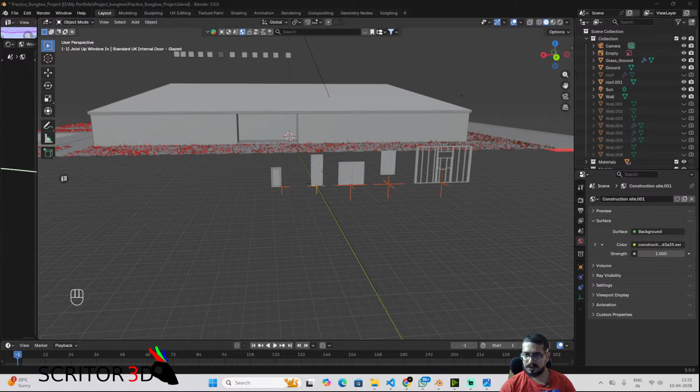Let me check my reference once again. Okay, I'm at the back side, so I'll select these five. I don't know what that is. Oh, this is a light.

Let me check what's happening. Okay, I need to work on my... I'll choose color, and for now

I can use a sky texture. Okay, not the sky texture, I'll use wave or noise texture. Okay, then I'll use a color ramp.

I'll give a blue like somewhat like this, and a darker blue, or maybe white would be fine, or a very light yellowish shade, and I'll add it.

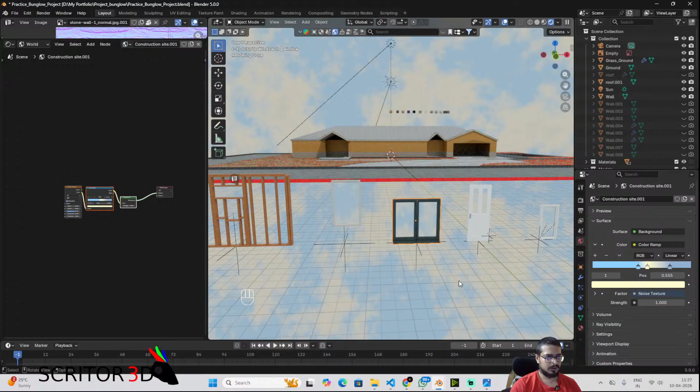Now we'll start with the windows and doors. For window, I'll select this window and we'll go back to object in shader editor for now, and I'll select the color.

I want that color, basically this one, so I'll copy this. This is material, the name is material, so I'll change it to material. Okay, so this looks fine now.

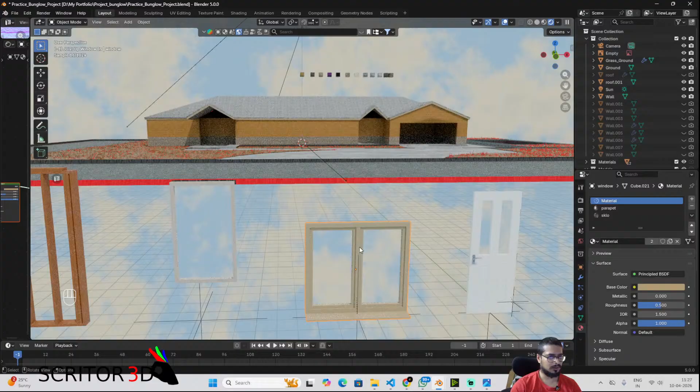In edit mode, I'll select this, duplicate it and move it on X 2.5, no, GX5, yes. So it looks somewhat like this.

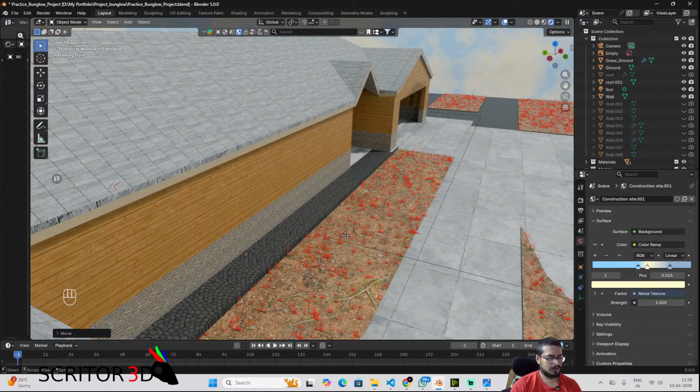So I'll move it back. GXY. GZ. I'll go to solid viewport so that it's easier for me to place things and do a boolean as well, but I need to keep

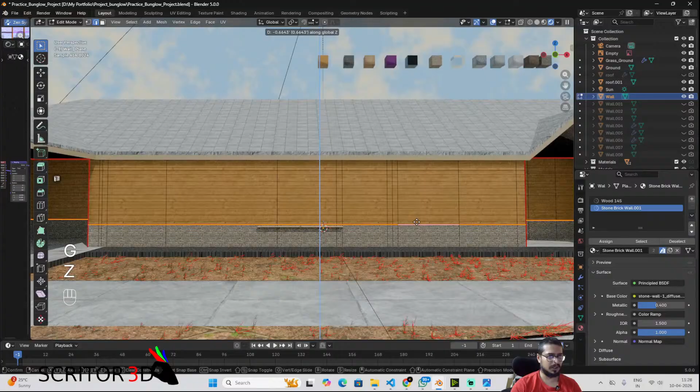the window above this boundary of the stone boundary, so I'll reduce this, take this down a bit to somewhat like this, and I'll select my window again.

I don't know which one it is. Yes, this one it is. So GY to something like this. GX.

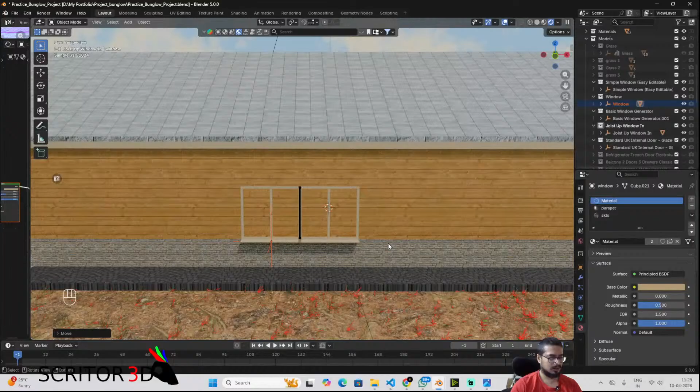I'll press Shift S cursor to selected. Shift A, I'll add a cube, or let me just select this. We'll go to solid viewport again, press 3 and select this. Yes, G. Okay, no, I'll not select this one.

I'll select only this. I'll duplicate this, P selection, and go to edit mode. Go to edge select, GY it, GY,

A, extrude, GZ, and I'll select this face, GX5, and

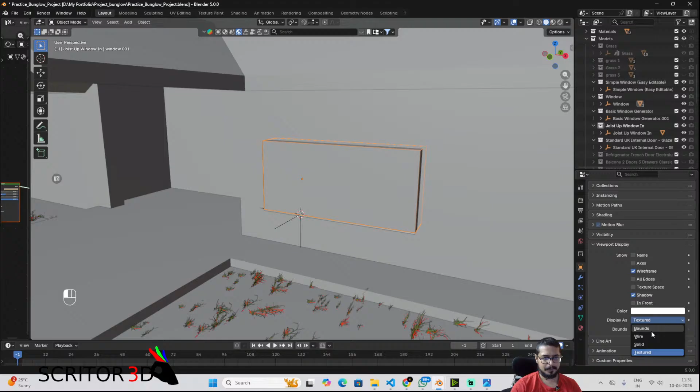I'll go to our object properties, and in viewport display I'll change it to wireframe, display as wire, and I'll select my main- what do you call this, the walls of our house, and then I'll go to modifiers, add a boolean modifier.

I'll keep it on- okay, it's kind of done. We have a hole in our wall now.

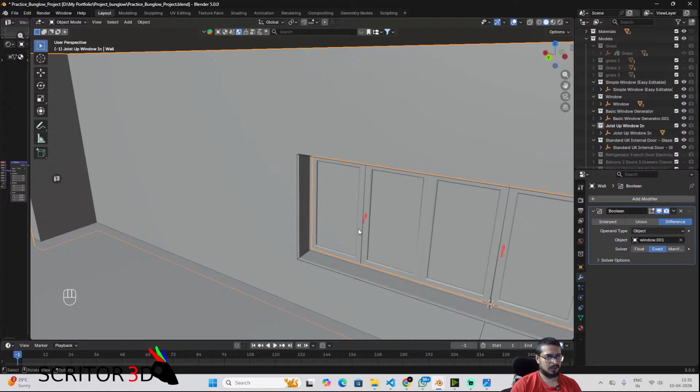I'll go to edit mode and move this down a bit, yes, so that there are no gaps. And let me just go to our rendered viewport and I'll select this box which I'm using for the boolean basically.

So I'll select this window, select the entire collection and press M. I'll create a new collection called windows and doors.

I did something wrong, I guess. Windows and doors. Create. Yes, so I'll delete this.

We have our window and doors over here. I'll turn off the boolean for now so that we can see what's happening.

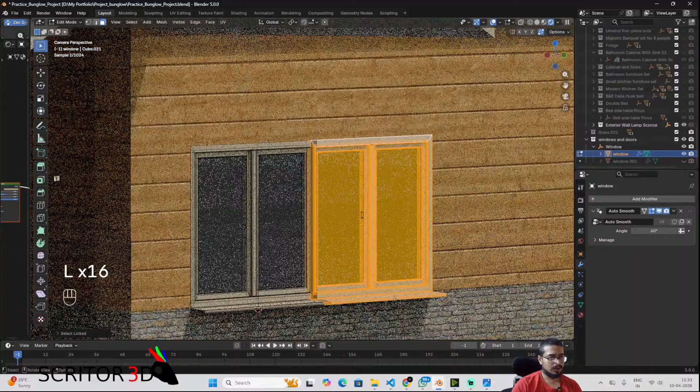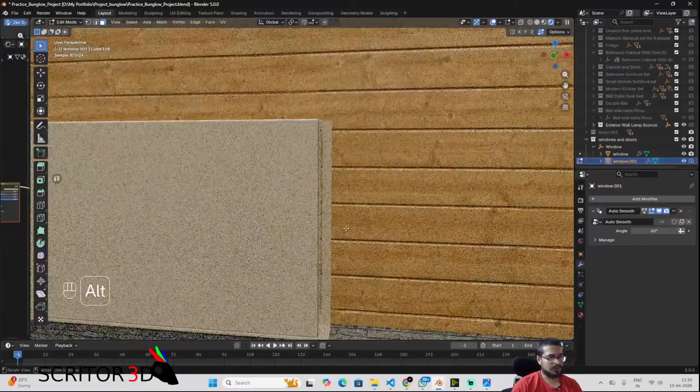I might have to adjust this boolean cube object. I'll move it on X as well, and turn this off. Okay, so this is it. I'll move this up a notch, somewhat like this, and I can even increase the scale.

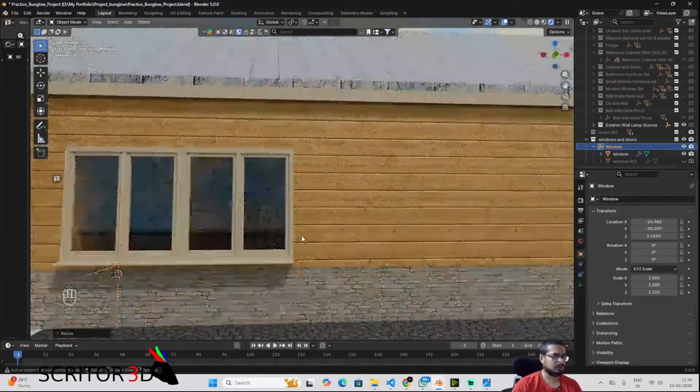I'll move it on X, and duplicate this, Shift D, X. Okay, one second, it was turned off, maybe that's why. Shift D, X, and Shift D, X again.

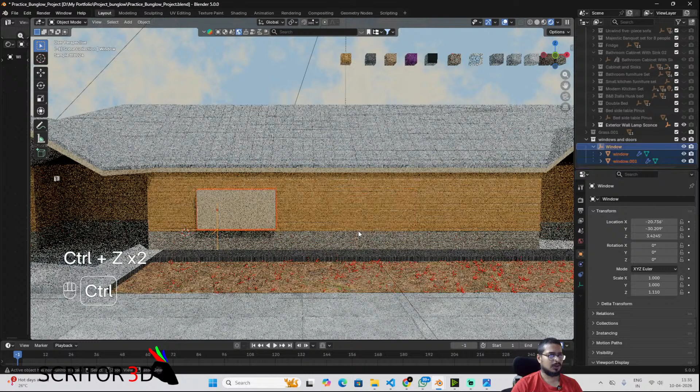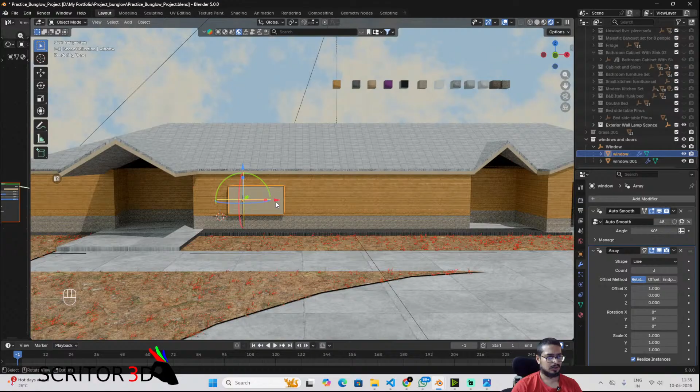Or I can use an array, that might be a better choice. So let me go to modifiers. I'll select the window, add an array modifier, and come to front view.

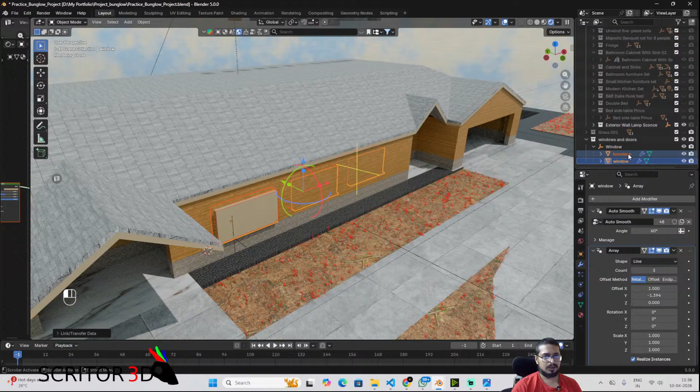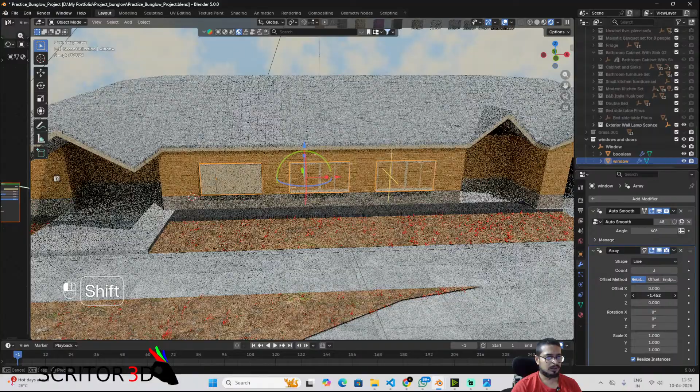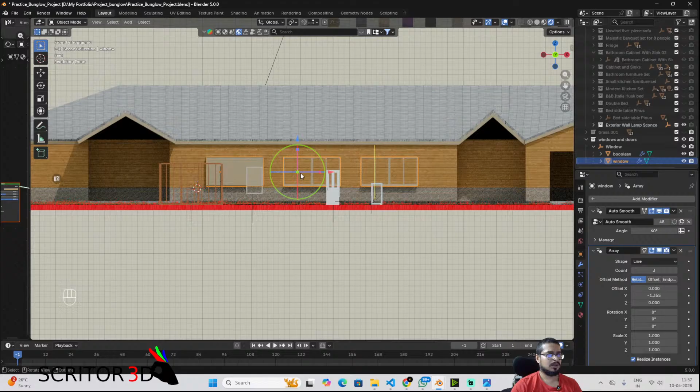Come to front view again. That's great. I'll do that again, Control L, copy modifiers. Oh sorry, opposite. Control L, copy modifiers. Now if I turn off the Boolean object, everything should be working.

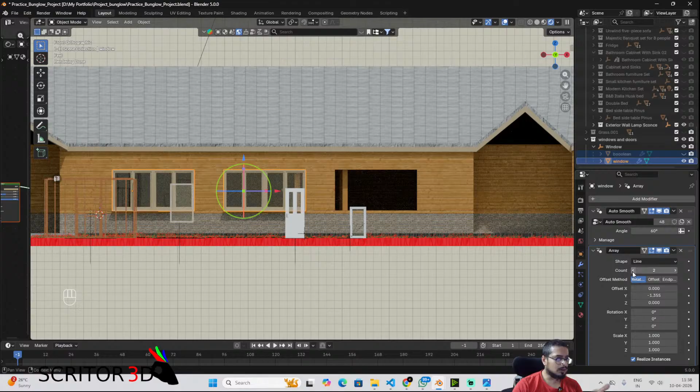I can reduce the count to 2, and same with the Boolean, reduce the count to 2. Now I'll select my window object and move it on the left side first, to somewhat like this.

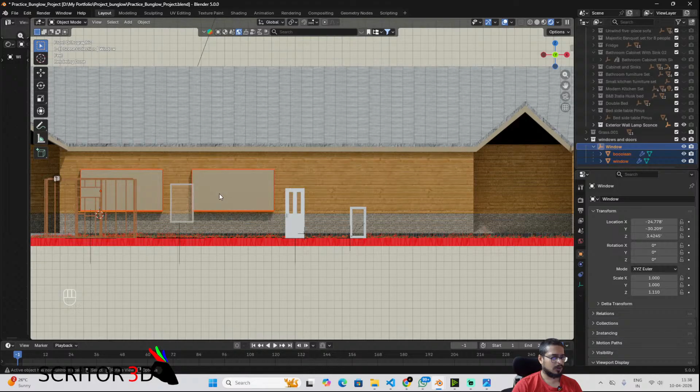I'll copy all these, Shift D, X, and move it on this side. In this one I'll remove the array for both of them, and let's check. Oh sorry, my bad. I'll turn off the Boolean objects for now. Okay, Boolean is not working on this one.

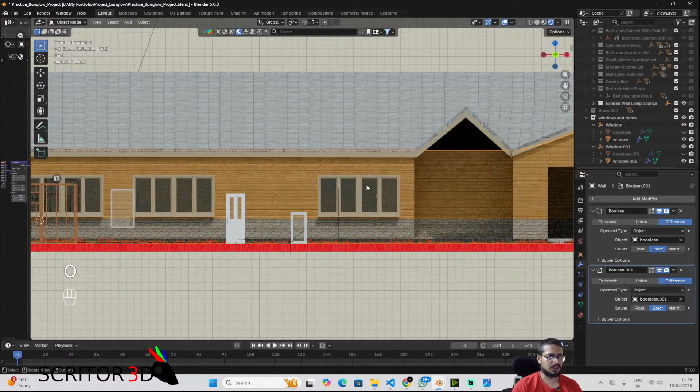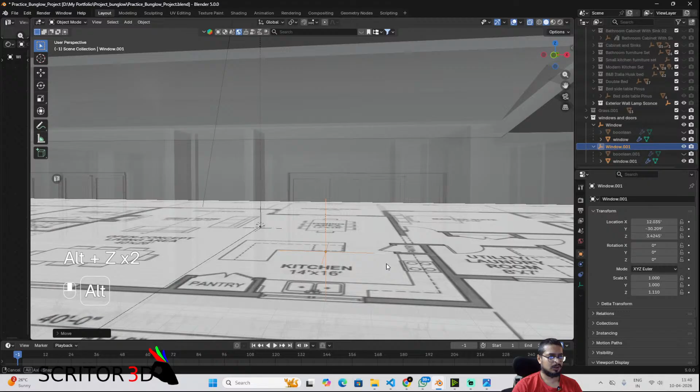Let me just select that, add another Boolean. Boolean 001, yes, done. I need to shift this window, GX, and I'll check and render viewport.

What is the result basically? Pretty much satisfactory. Oh okay.

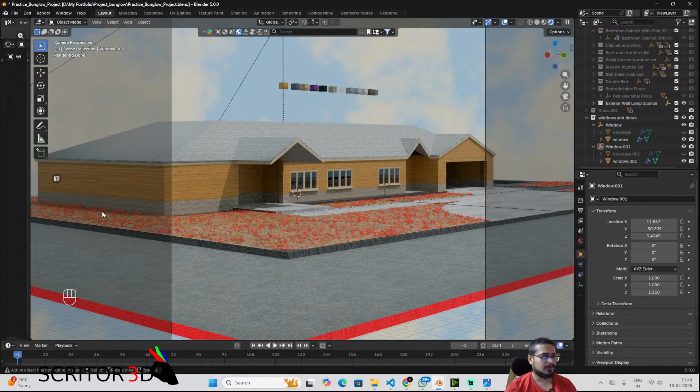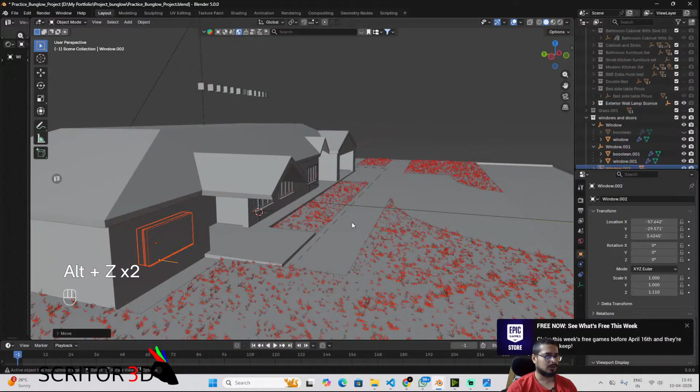And now I'll add, I need to add another window on this side, so I'll select these three, duplicate them on X, and come to side view. GY. Too many ads I guess.

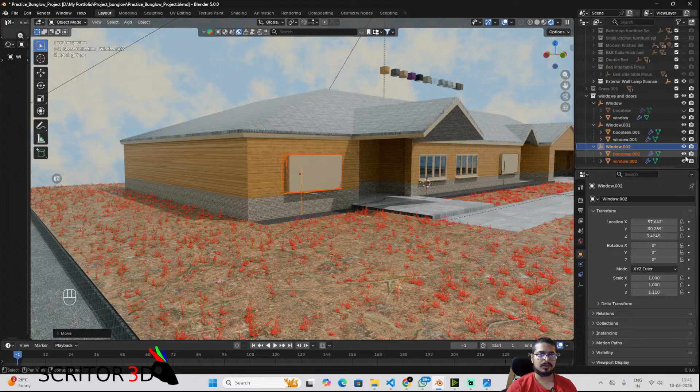That's it I guess, let me just check it. Okay, I need to have another Boolean now, or I can add all the Booleans together, join them all together. I'll join all of them, so that I don't need too many modifiers stacked over here. So I'll select the second boolean, then the third, pressing control, and then the last one.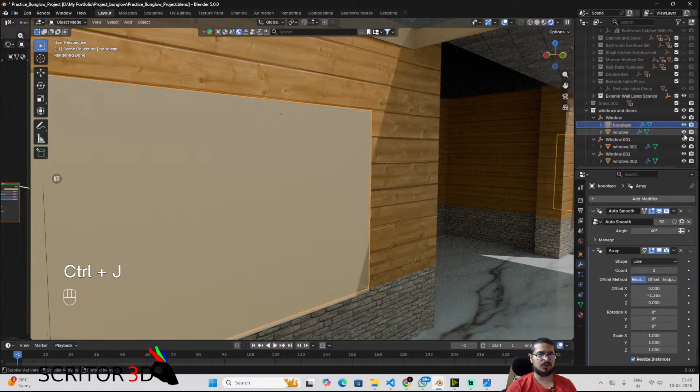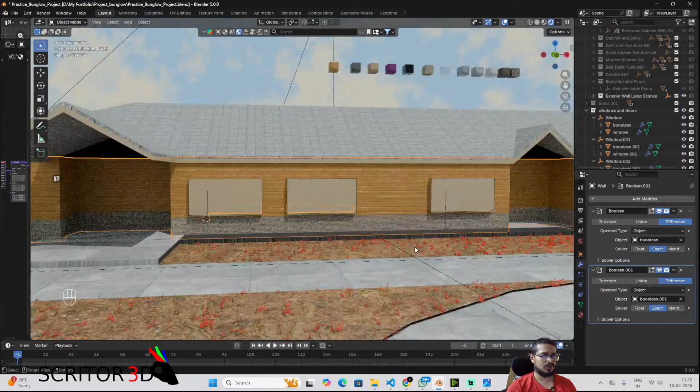And I'll press Control J, I'll join all of them. Now okay, on array it's not working now. So we need to, so I'll press Control J, sorry, Control Z, not Control J, Control Z. I'll join this one and this one, sorry, other way around, Control J. And now if I turn off all the booleans,

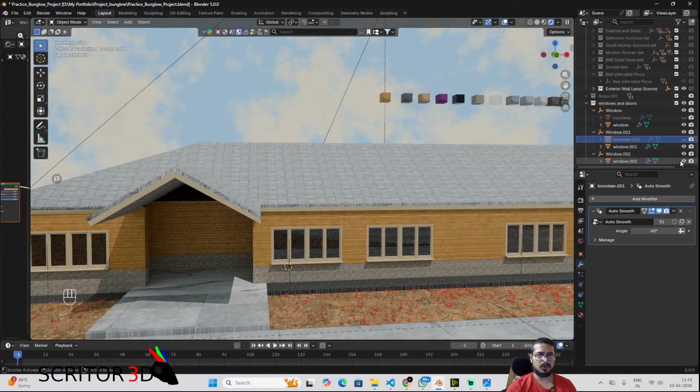Yes, everything works fine. I can maybe shift this a little on X. Okay, I might have to turn this on. Go to edit mode, press L to select only this one and move it on X as well, a little more. Yes, now if I turn this off, it seems fine.

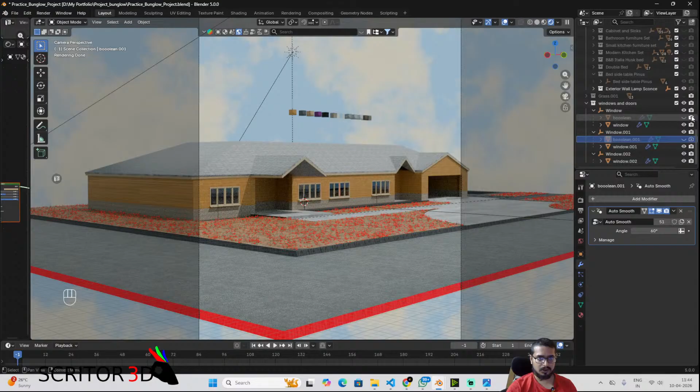Let me just take out a quick render to check. Okay, I need to turn off the visibility of the booleans and render it again. So this is what I'm getting as of now. Cool.

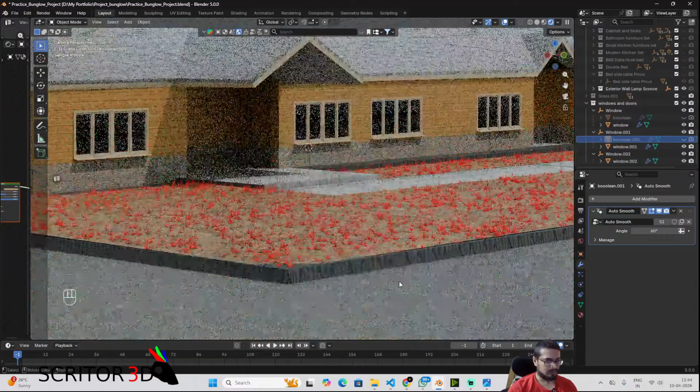I'll press A, N for opening the N panel, mark by angle, U, unwrap angle based, and now I might, okay, black paving stone or whatever this is.

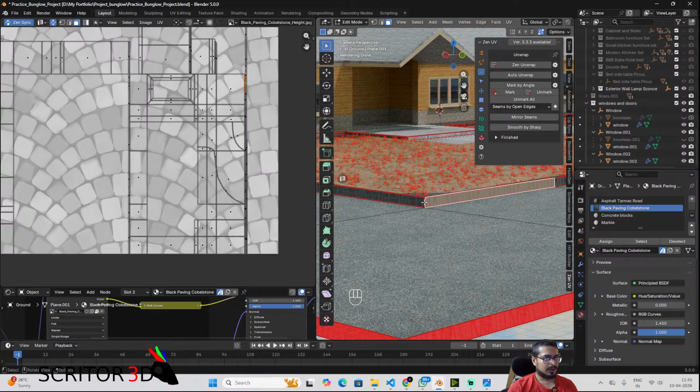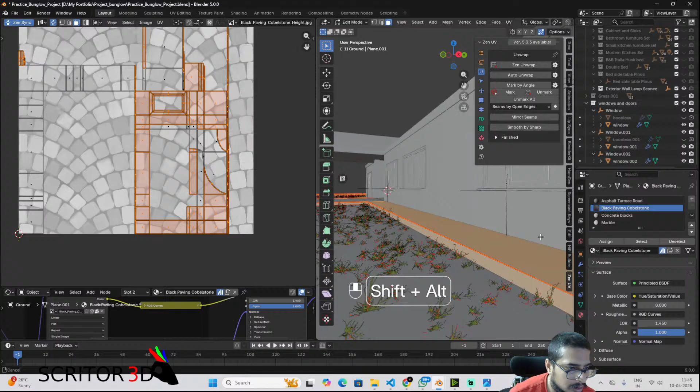Let me just select all these where this texture is being applied. Let me go to the solid viewport. Okay, so I don't, cool.

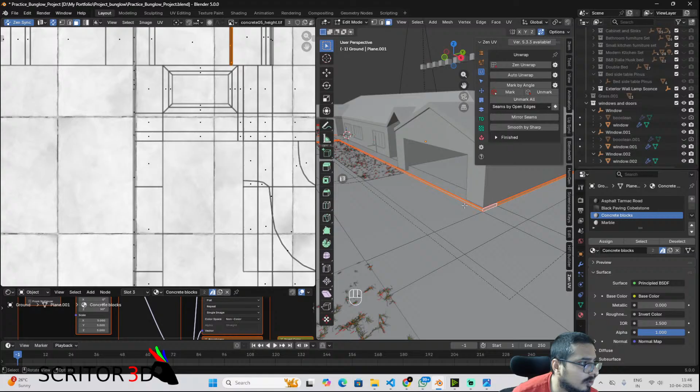Mark seam. I don't know why it's different. Assign concrete blocks. Okay, let me just go back to render viewport quickly.

No, edit mode, assign, and scale this up.

Nothing's changing somehow. I think I need to apply scale. Nothing's changing, that's seriously weird. I might have to, no changes at all.

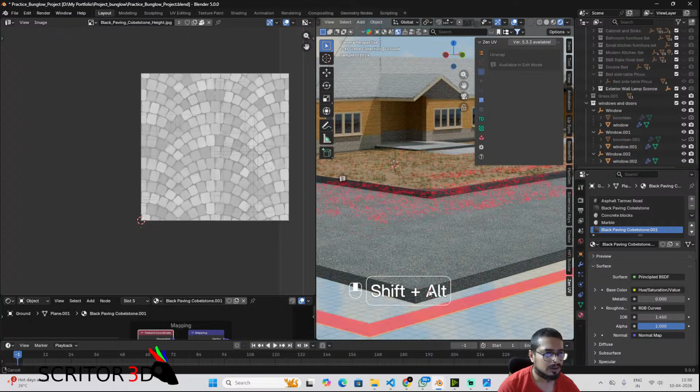Okay, it's on object instead of UVs, that's the reason for it to not work. Now it will. Let me go back to my UVs again, scale this up to something like this. Now it will work fine.

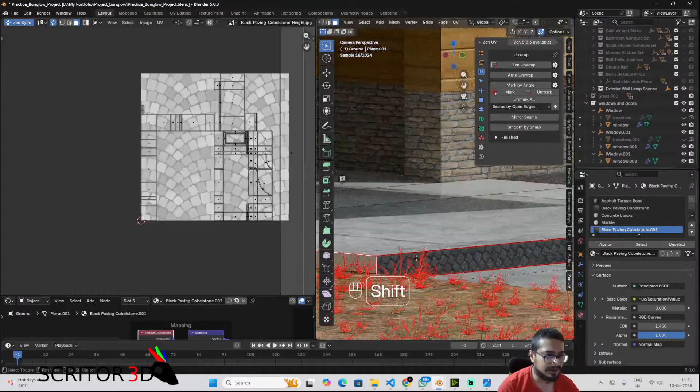I need to add small detail over here. I'll select this and this side, even though it's not visible, but still. Okay, this much, and I'll choose my marble, assign.

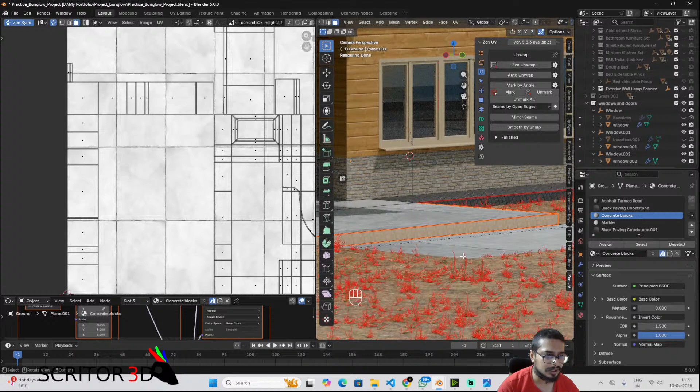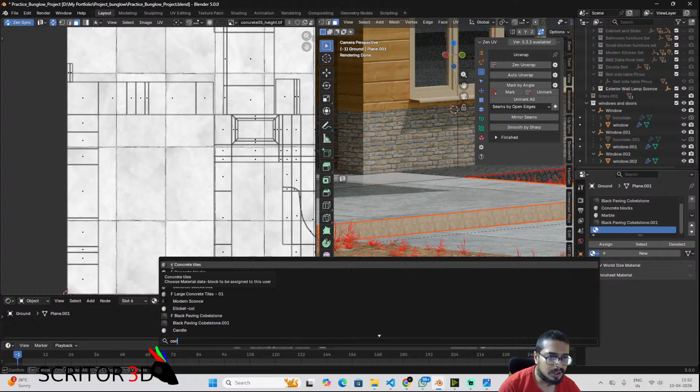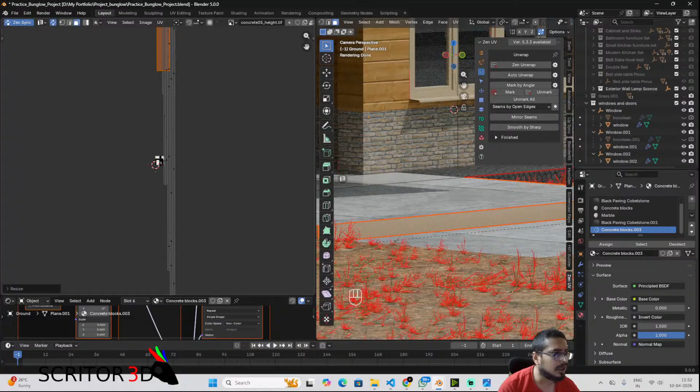I'll go back a few steps. This is what I need to add, but I need to add another material where I'll use the same concrete material, concrete blocks, and I'll duplicate it again and assign it. I'll scale it up, or I might have to scale it down. Yes.

Somewhat like this. This seems fine. Let's add some pillars and stuff to this part.

Because this door is like, I'm going to model that door. Because I don't have a specific door which fits fine, I'll use this door as the base, and I'll add a few more details all around so that we have a nice door over here.

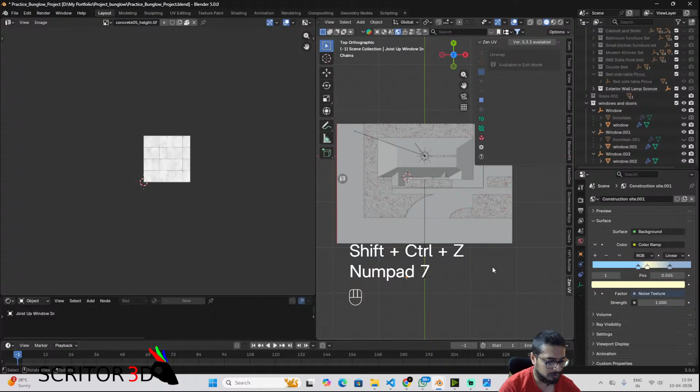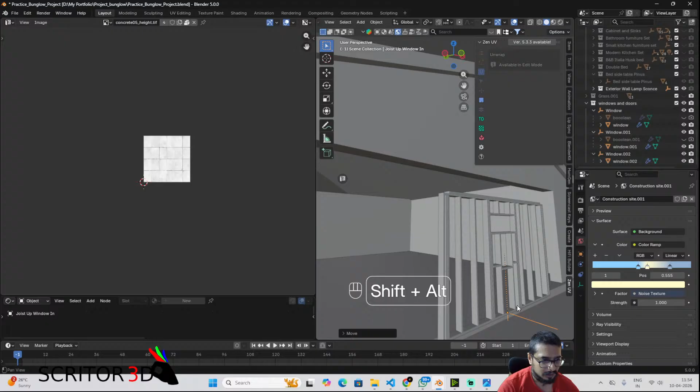So we need to add a small ramp as well so that it looks nice, because the car won't get in easily if there is a 90-degree step over here which I need to work on, as the car might not be able to climb this stair or whatever you want to call it on the platform.

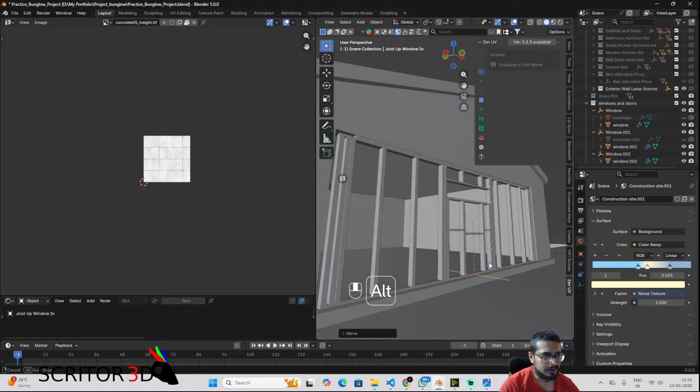I'll come to the front view. GZ, SX, GX, SX, GX, SX, and SZ. Okay, SZ smaller, GY. Yes, I might have to scale it on X a little more, move it on X a little more.

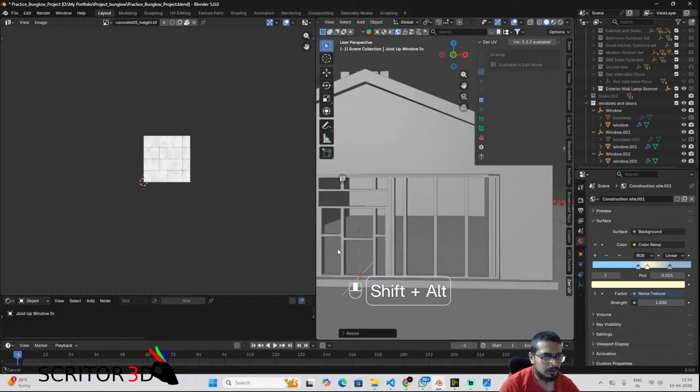Now I need to add some windows or some material to this. Okay, these are all separate blocks actually. So what can I do? I might have to add 3, 4, 5, 6, 7, 8.

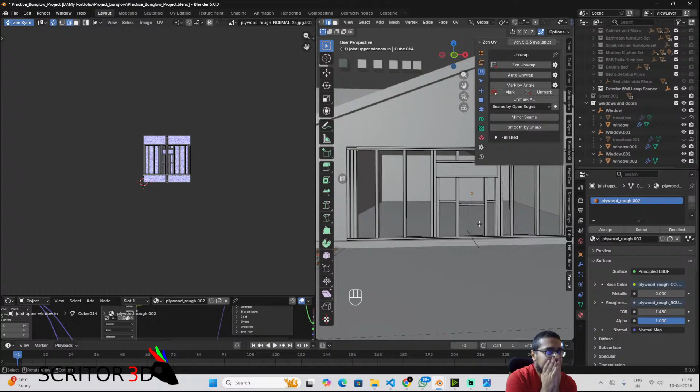Cool, I'll add some loops, and from those loops I'll use this edge, and I'll add it over here as well, over here as well, and one over here.

What I'm gonna do is I'll use this, this and this edge, select this one, and I can separate it. P selection, go to edit mode, A.

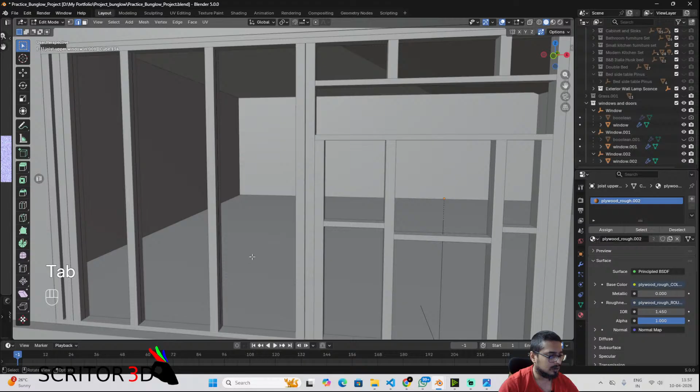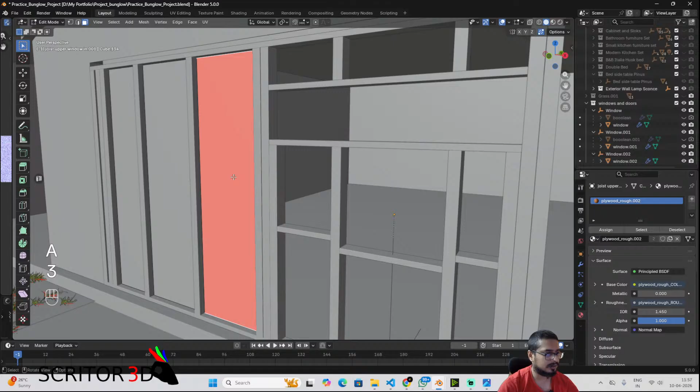So I'll select this one and this edge, press F to fill it. This one and this one, press F to fill it. This and this, F to fill it. I'll select this 3, Alt N, flip. Okay, done.

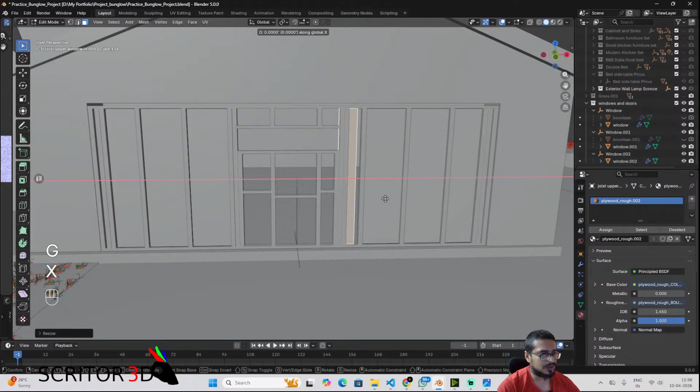Cool. Shift D X. Shift D X, Shift D X, Shift D X, SX, GX. And we have got our windows.

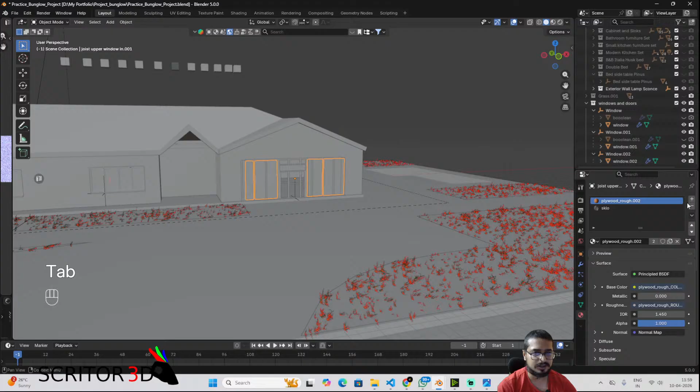I'll check what material we have, like SKLO is the material, so I'll add a material, uh, I'll just remove this one. Let me just check in render viewport. Yes, it's working fine. I can now create a duplicate copy of this material and add some color maybe.

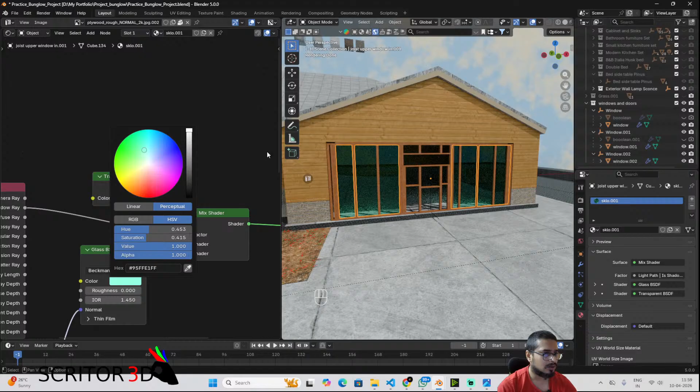Let me just check. Yes. And now I need to add a few more of these. So I'll select this, Shift D X. I'll keep it in center, scale it on X, move it on X. This is what the result is.

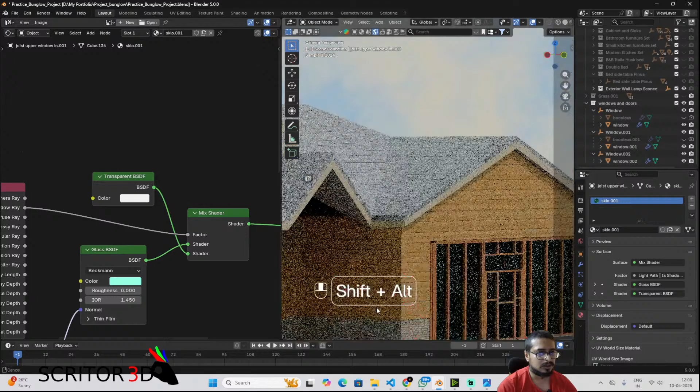I'll select my roof. I want to take this part out a little more, like this, GY. Yes.

I'll add a small balcony pillar or something like that over here. Sorry, fence over here.

Let's just take out a quick render and check how things are looking at the moment. Okay, so that's not visible. I don't know why, but yes, I'll move all this to our windows and doors collection.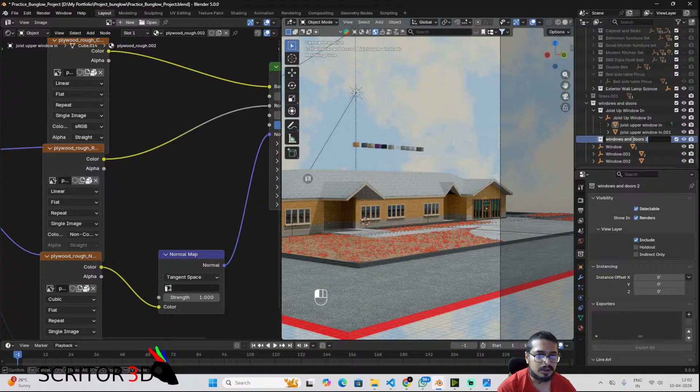I'll add a new collection, windows. Yes, and I'll move all these windows into this collection windows. Just keeping things correctly in the collection system so that it's easier to manipulate things later on as well.

And I'll take out a render again to check. Yes, looks better than before, obviously. And so not bad at all. We can keep on improving.

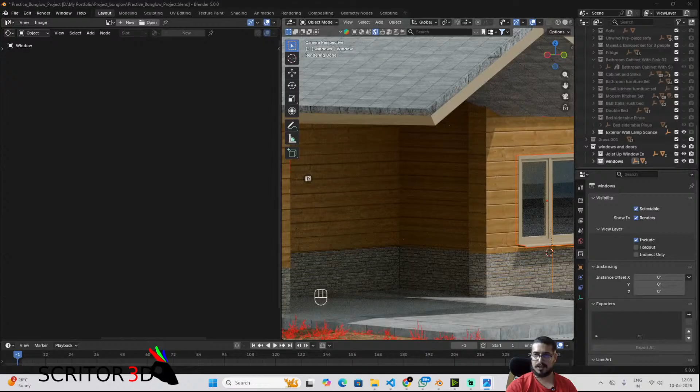Definitely will do more changes. Wait, let me just go back to my reference image. There was a lamp.

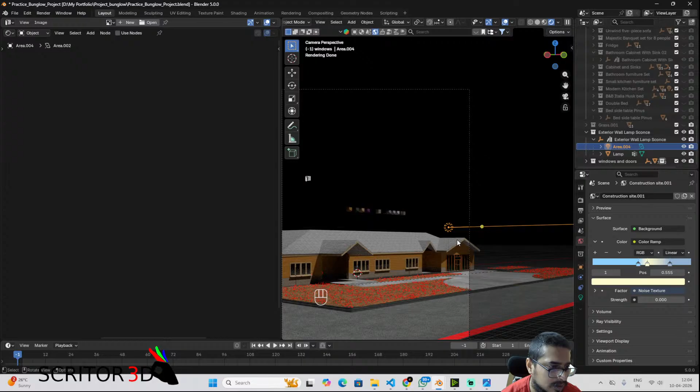I'll delete this one for now. I'll go to my world properties and reduce the strength so that it's easier for me to check how the light is actually working. The lamp is too small or what? Okay, this is this lamp. So I'll move this down.

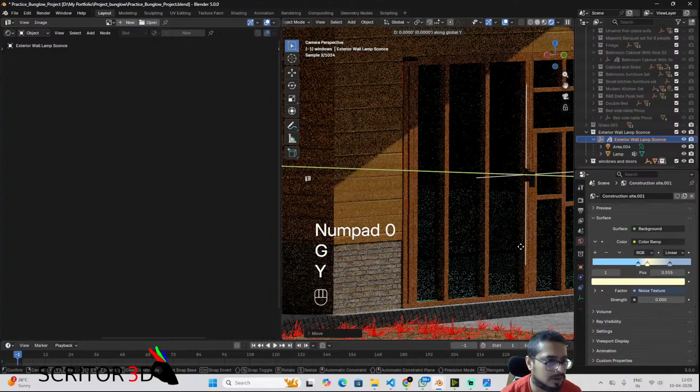RZ 180, RX 90. Okay, GY, GX, GY. I'll go to top view. First of all, I am going to place it over here. GY, GX, GZ.

I'll duplicate this. RY 180. Move it down to something like this.

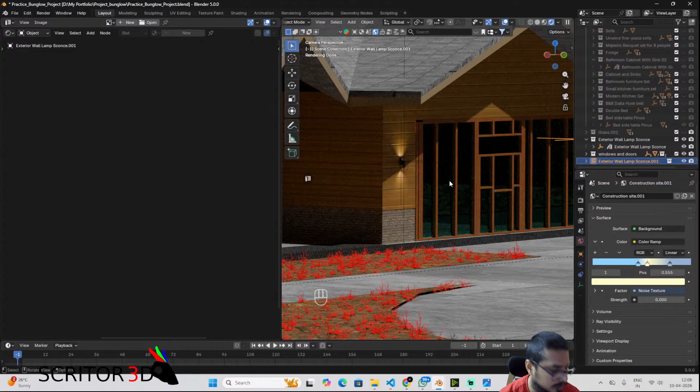And now I can create, like, press Shift A, collection instance, exterior wall lamp sconce. Okay, I'll use this, GX. Let me just check where the origin is. Basically Q, origin to geometry. Yes, now it will be way better to move things around.

Somewhere here I want this, so 3, GZ, GY, GY, GZ, GY. Yes.

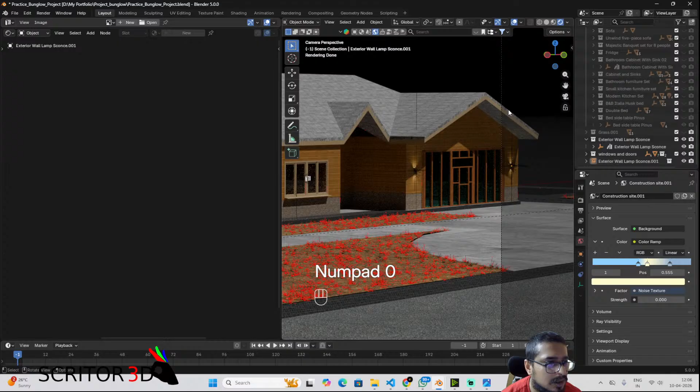Let me go to render viewport. Okay, it's out of my render basically, but still just checking what's happening right now.

I might change the colors to a darker shade so that it feels like it's about to get dark a little.

Or I should just go for the black. So the clouds are way too on the heavier side. I should reduce the clouds.

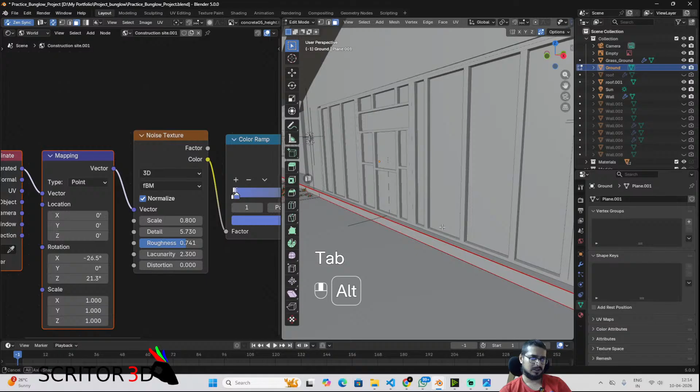And let's add the ramp. I'll save the file. Saving the file is very very important. I have a very powerful PC, so it's not crashing that quickly. But if you don't have a good machine, it will crash quite often. So it's better that I have separated the mesh. You need to save the file basically. After a few steps that you cover, you should save the file. Keep saving the file whenever you do 4 or 5 changes.

I'll add this texture, which is concrete blocks. Let me just take out a quick render again. Yes, much better.

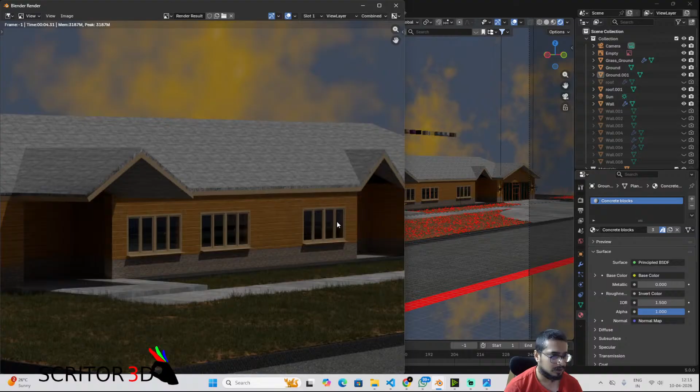Let's add few more details. I'll duplicate this, Shift D, GY, GY, a little more, yes, and then duplicate it on x-axis, Shift D X, Shift D X, and Shift D X.

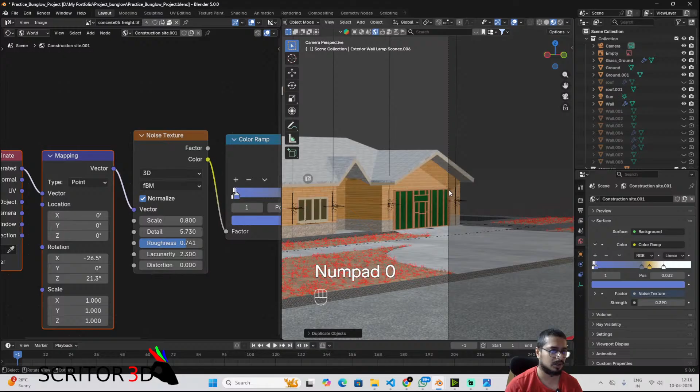Instead of material view, I'll go to the render view again. Come on, come on. There is some issue. See, things start to act weird.

Just after adding these lights, it's not rendering at all. I don't know what's happened. Should I restart the file or what? Refresh.

Let me just save and exit. I think there is some major issue that I need to address now. Why are the lights not working? Oh, come on.

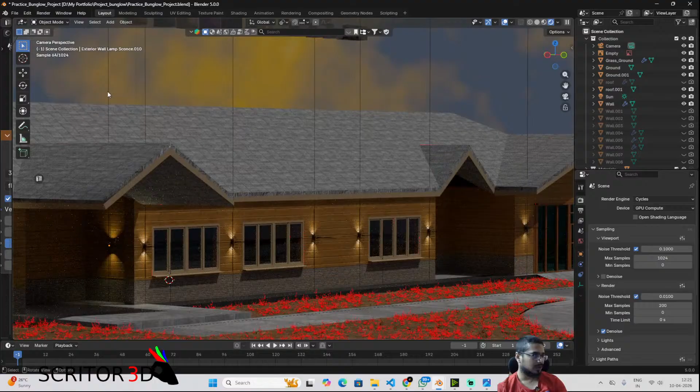Cool. Let me just take out a quick render. Seems nice, no issues. I'll be adding some plants, the door. I should add one light on this side as well. So I'll select this, Shift D X.

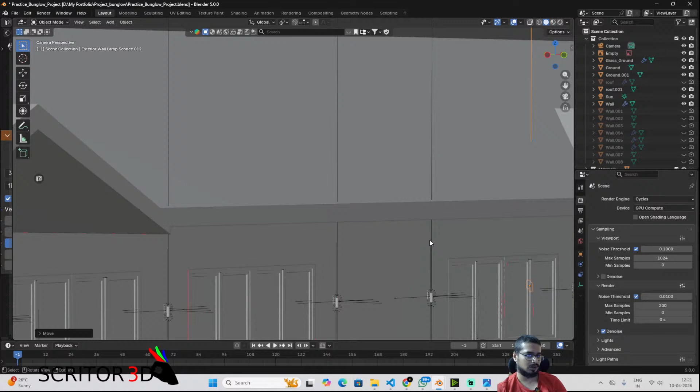GX, Shift D X, RZ 180, GX. Even though it's not gonna be visible in our renders, but I'm adding it because it will add some light to the scene, which might add some more realism, I guess. It's totally up to you if you want to add it or not, because again, if your PC can survive all this, then go ahead, otherwise just avoid adding extra lights, because it's gonna be painful for your PC.

I'll reduce the sample to 124 only instead of 1024.

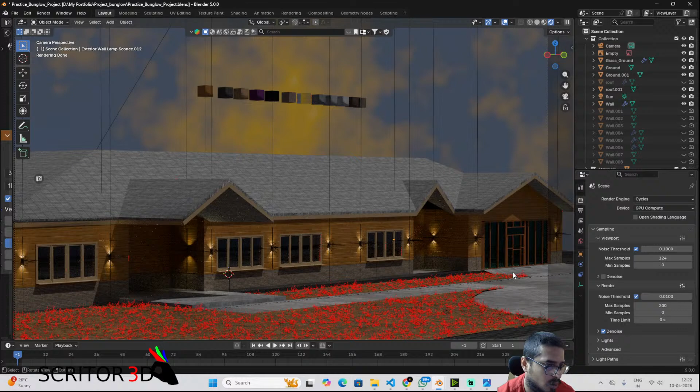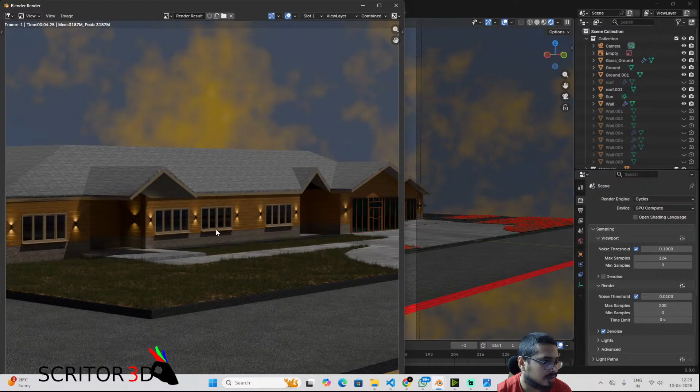I'll be adding a footpath over here as well. I'll add a few foreground details like some plants or a post office box or any details that make sense, right? Or a board which says which society this is, or a board which says keep the roads and environment clean, or anything like that which makes a render look more beautiful, right?